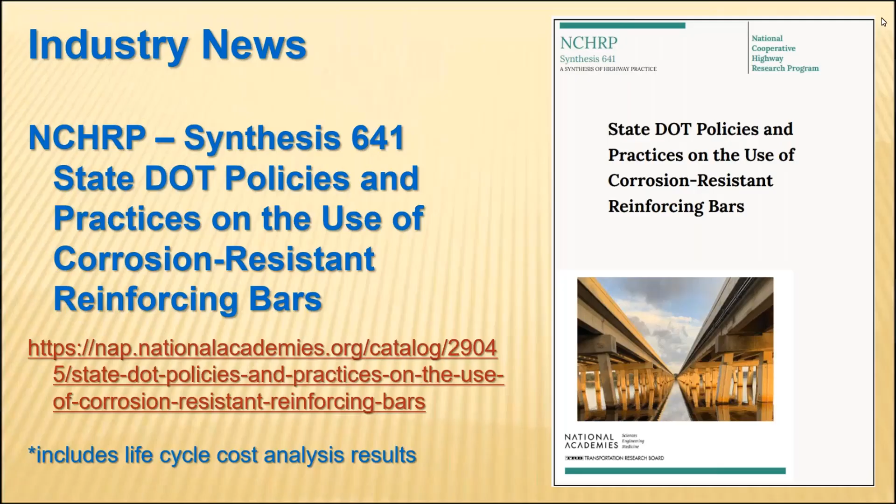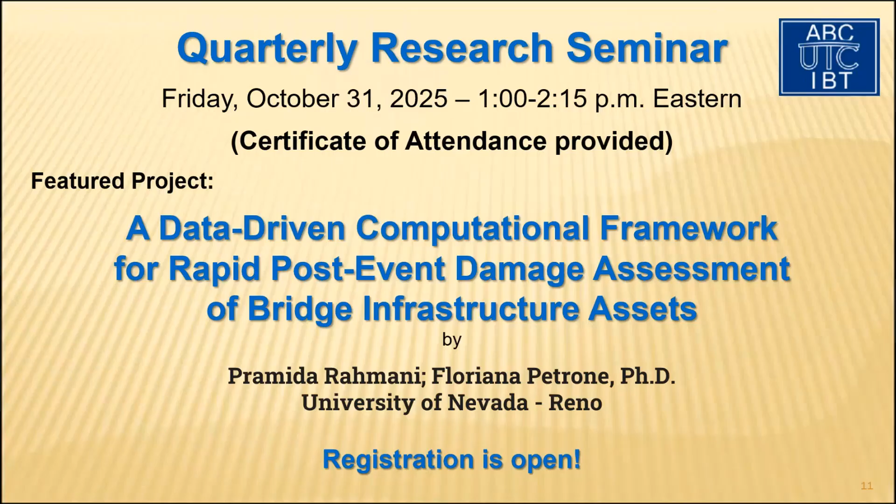Now for a few of our own IBT ABC UTC events. Our next quarterly research seminar will be held next week on October 31st, a Halloween event, from 1 to 2:15 Eastern. Our colleagues at University of Nevada, Reno will be presenting on data-driven computational framework for rapid post-event damage assessment of bridge infrastructure assets. Our next monthly webinar will be on Thursday, November 20th from 1 to 2:15 Eastern.

The presentation will be a one-sided approach, the longitudinal launch of the Pretty Rocks Slide Bridge. This is a really amazing project. They longitudinally launched a 425-foot Warren truss over a landslide area to reopen about half of the main park road at Denali National Park. It's going to be really a great presentation. Devin Altman with Jacobs will be doing the introduction, and it'll be followed by Jason Sieg and Chris Sweetgall from KWH Constructors with the details. Registration is already open. You can sign up on the IBT ABC UTC website now.

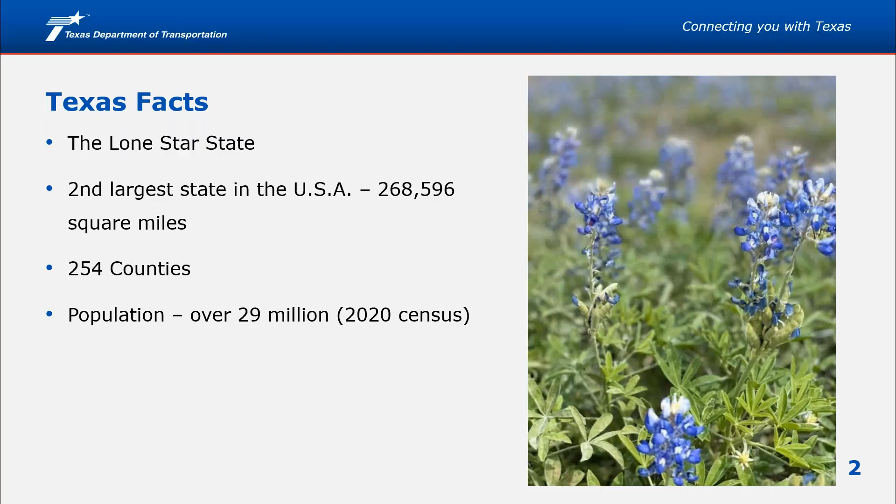We are the second largest state in the United States with over 260,000 square miles. We've got 254 counties, and we have over 29 million in population as of the 2020 census. Just a little bit about our bridges. We have over 56,000 bridges: for the on system, a little bit under 36,000, and then a little over 20,000 off system bridges. So we have quite a big inventory of bridges we take care of.

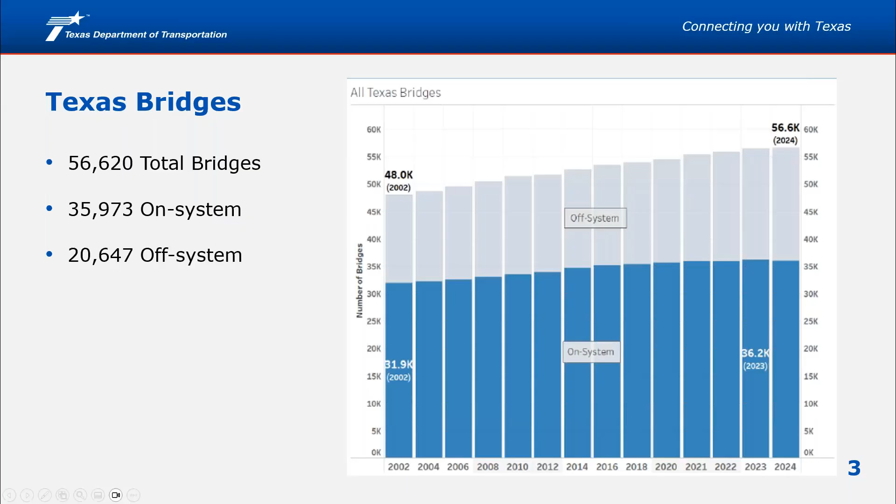The next slide just kind of talks about what have we been up to. This is not everything, but just like a lot of states, we are focused on digital delivery and working towards pilot projects, and we have a lot of different tools available to make that happen. We do monthly webinars. We call them bridge briefings, and those are free. They're during lunchtime, and we started those about a year and a half ago.

If you're needing some example bridge items, we have over 875 bridge standards. We also have bridge repair working drawings on our site, and all these are in PDF and DGN format, so you're able to use them for whatever project you're working on. We try to have data-driven decisions by using BRM when we need to do certain treatments on our bridges for preventative maintenance. We have a full suite of dashboards for our districts to use and see how they're doing for the different metrics that we follow.

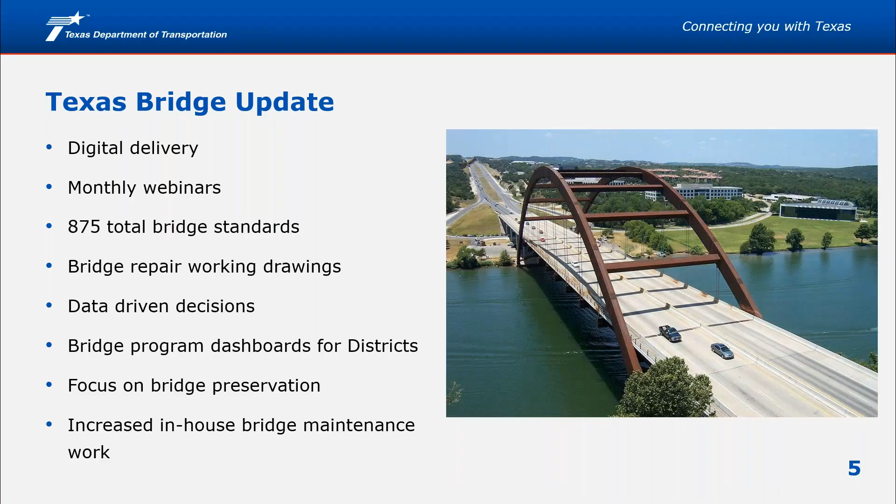Like I said earlier, we try to focus on bridge preservation around the state. Over the last 3 years, we have significantly increased our in-house bridge maintenance. We're doing that through training, getting out there and training the district workforce on how to do these repairs, and also putting out a lot of tips for construction and repair. All right, so that's just a little snapshot, and I'll turn it over to you, Robert.

Thank you, Jamie. Welcome, everyone. My name is Robert Owens. I'm with the Bridge Design section of the Bridge Division of TxDOT. I'm going to jump right into this. I have quite a few slides. I'm going to take you down a path, starting with a little bit of history within Texas, and it leads you into how we are evolving in terms of looking at ABC within the state of Texas. So I'll start here with the table of contents.

I'm going to start off with ABC the Texas way, what we've been doing and what's been working in terms of what we use in our standard details and how that has propelled us in terms of an ABC approach. Then I'm going to talk about a past project, a sample project, to talk about things we learned and how we're trying to evolve to improve our process and design decisions for ABC.

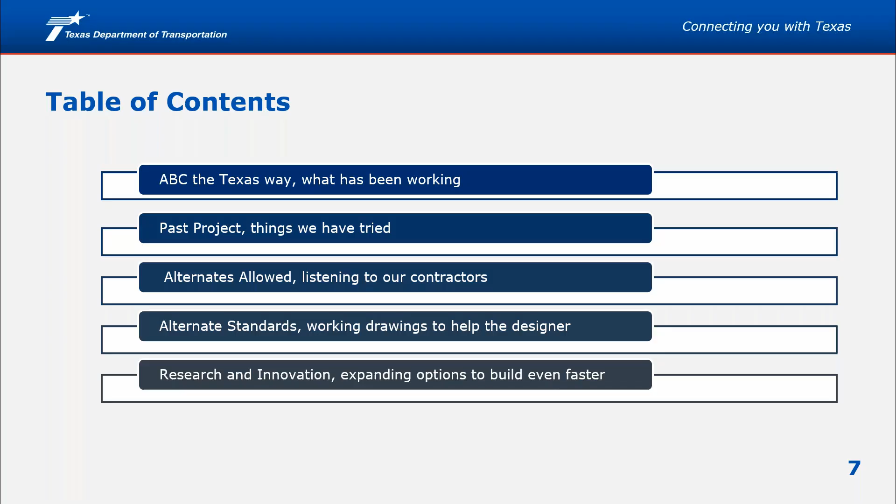Then I'm going to jump into what we've learned and how it leads into new innovations, like allowing for alternates within plan sets, and providing those documents as a toolkit for our designers to make these more of a standard practice and also simplify things for our contractors. Then I'm going to jump into research and innovation, looking at what we've learned and expanding our options to build even faster.

So I'll start off first with ABC the Texas way, just a brief highlight here. Texas is centrally south located within the United States. So we have coastal regions, marine environment. We have desert regions, mountainous areas. We have the Panhandle of Texas, which can get quite cold, so we do have ice and snow. So we do have varied temperature and geographic conditions within the state of Texas.

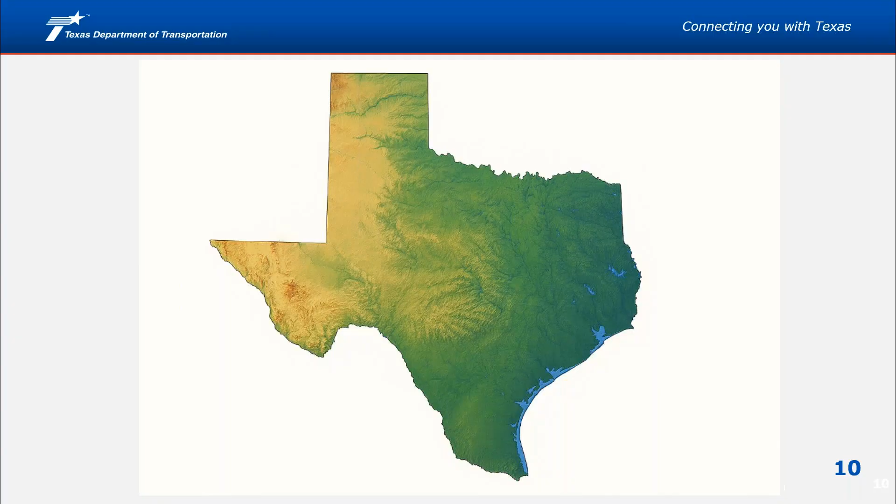Just a couple maps here to share. Looking at accelerated bridge construction, I challenge people to rethink what accelerated bridge construction can be.

For TxDOT, we look at ABC as not just highly complex approaches. We look at what we've created within our standard library to actually help turn around these projects in a quick time frame. So that's our goal within TxDOT.

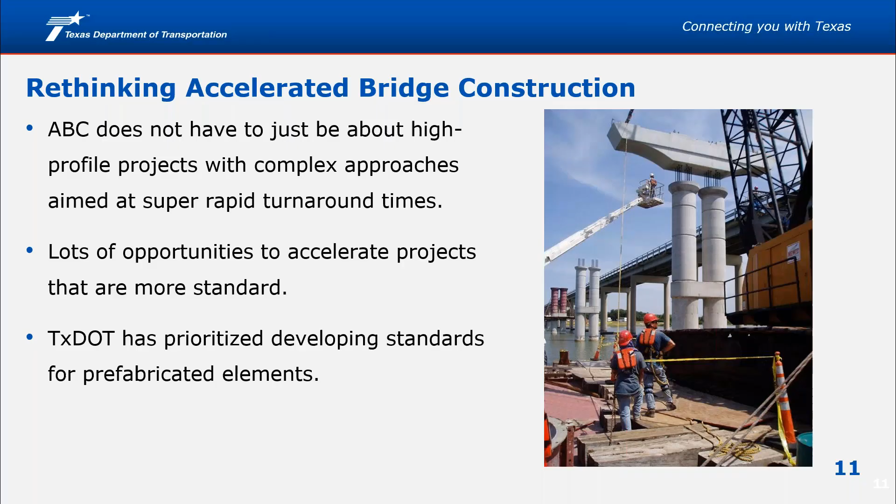A lot of our standards prioritize prefabricated elements. Another thing we do is try to keep it simple. This is feedback we received from our contractors, since they're the ones building these projects. To keep these projects moving quickly, I think keeping it simple is key. We try to utilize as many standard details and techniques as possible, and we also allow for opportunities to include multiple options within the plan set. I'll get into that more later, and how that became another tool in the toolbox.

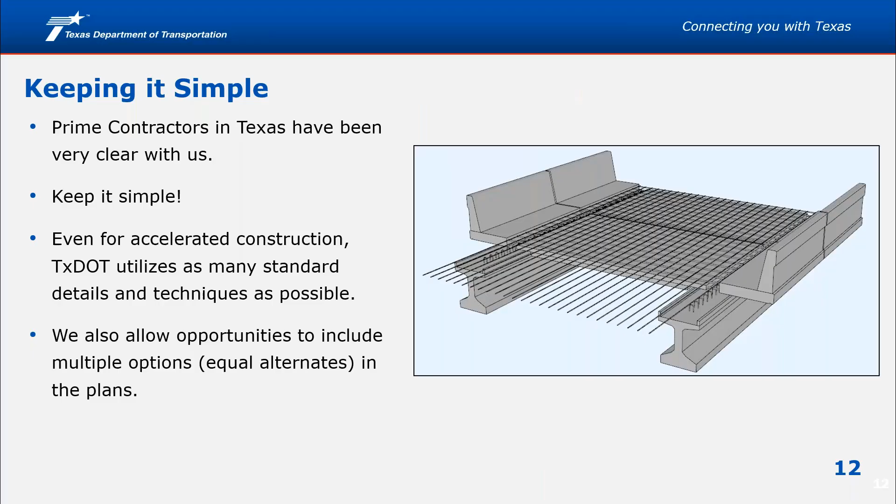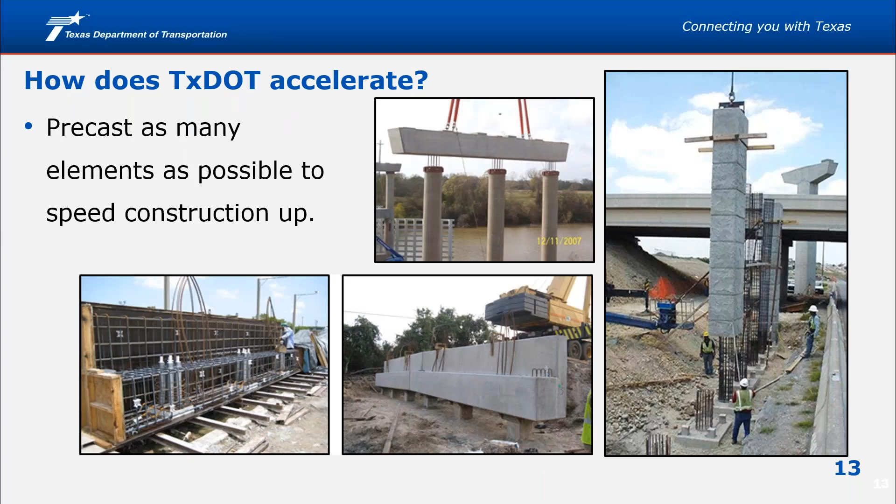We accelerate. We try to precast as many elements as possible to speed up construction. You can see several pictures here of different things we've used in past projects - precast caps, abutments, and also precast columns. Texas has a history of designing and detailing for ABC for a long time. One of the earliest inclinations for this approach is the use of our precast concrete deck panels, PCPs.

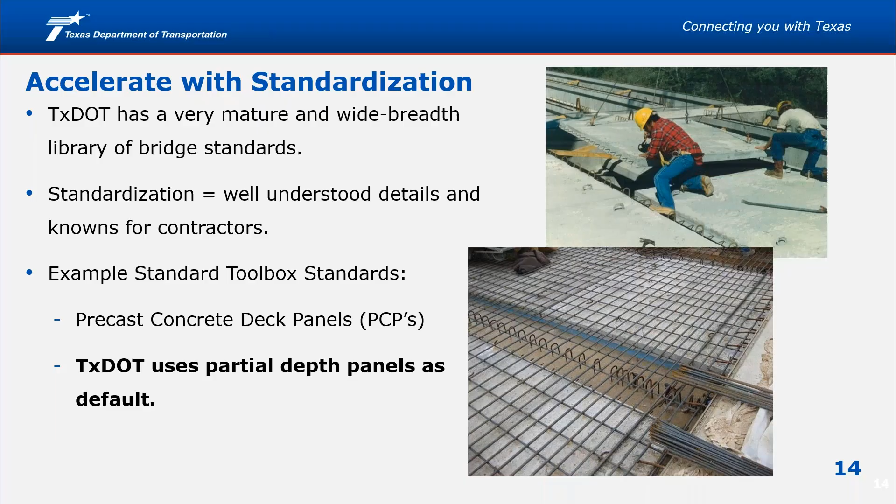We look at standardization. We've created these standards and details to accelerate construction. You can see this picture on the top right - it's an old picture, so we've been using PCPs for a long time. When we standardize these details, it makes it a regular process and procedure for our contractors.

That's one of the benefits of standardization. Again, PCPs are panels, and another go-to is our pre-stressed concrete beams. We have our Texas shapes that we developed back in the day - these have been around since the early to mid 2000s. We worked closely with our fabricators to come up with these shapes and designs to accelerate construction. You can see that picture on the right showing the PCPs and how that comes together.

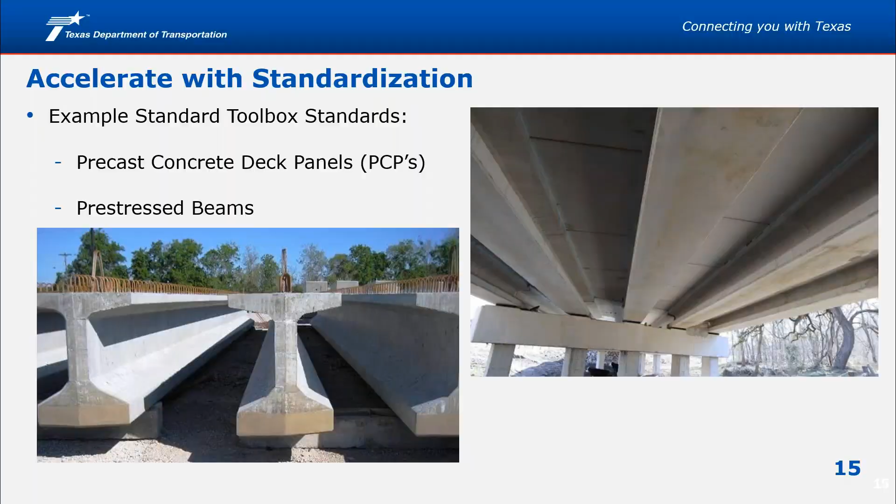Leading from the Texas approach, within our methods we've standardized so many different elements that we've kind of created an ABC approach. Maybe it's not as fancy as some slide-in type projects, but standardization has really helped us. So then looking at a past project, we want to look at projects we can learn from, to innovate, push the envelope, and develop new procedures for our designers.

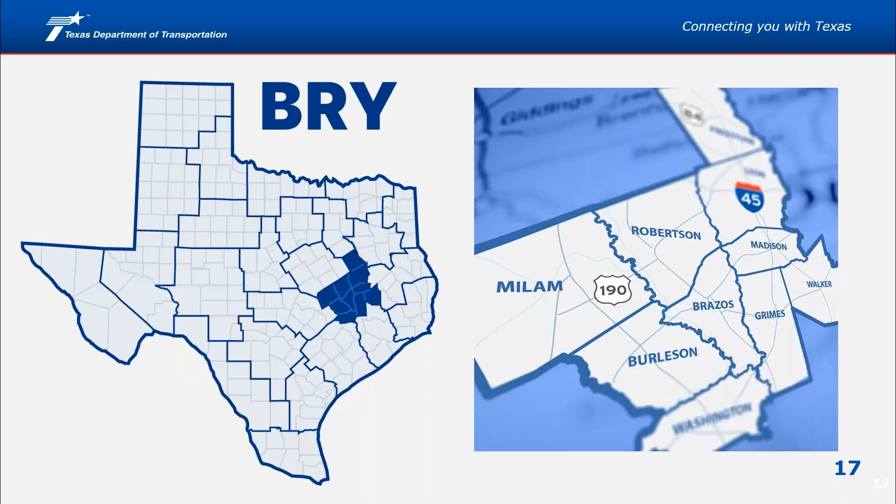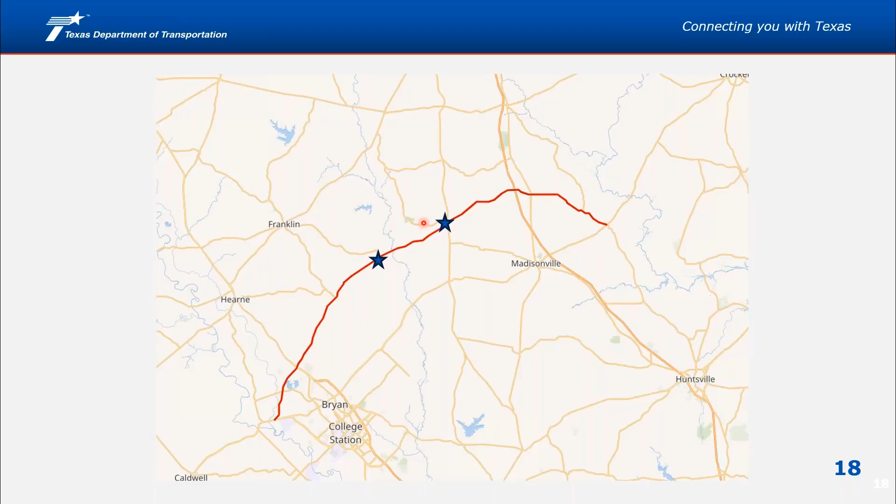So, maybe not the cheapest, but we wanted to get in here quickly to allow the traveling public to travel this route. What we did is we looked at UHPC closure pours, but then we also developed our own in-house rapid set fiber reinforced concrete, due to the proprietary costs associated with UHPC.

So we developed a Texas mix for UHPC. Construction access cost was also critical to fabricate and place these elements, and that cost about 800,000.

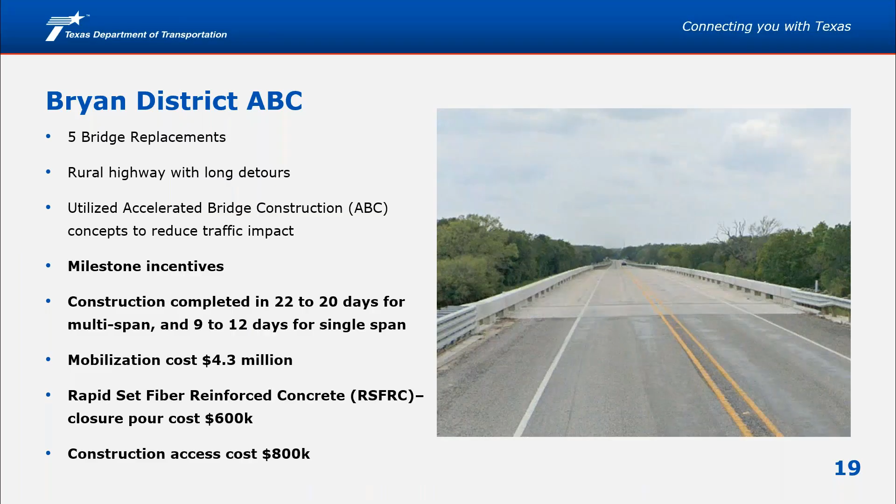So what the consultant did, and we worked with them, was develop a 6-girder system where they actually cast the deck with our Tx girder shapes off-site, creating a prefabricated unit with the deck and girders. We also focused the closure pours within that rapid set fiber concrete over the top flanges to eliminate the need for forming.

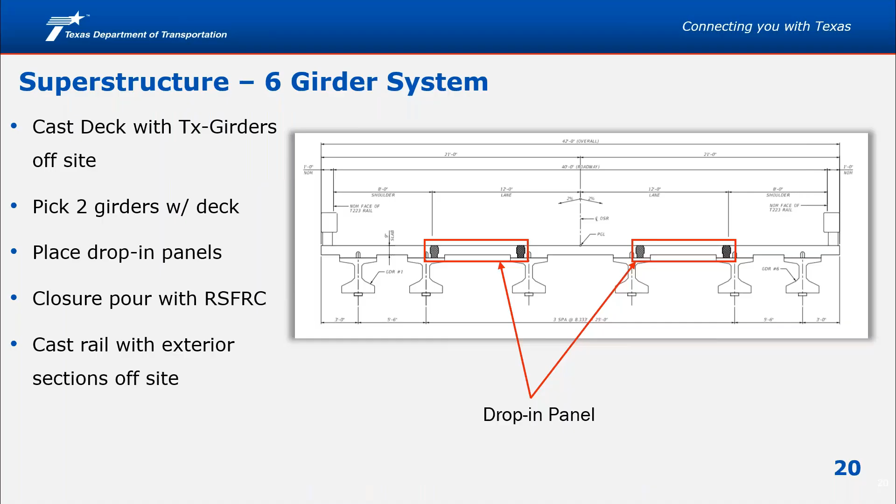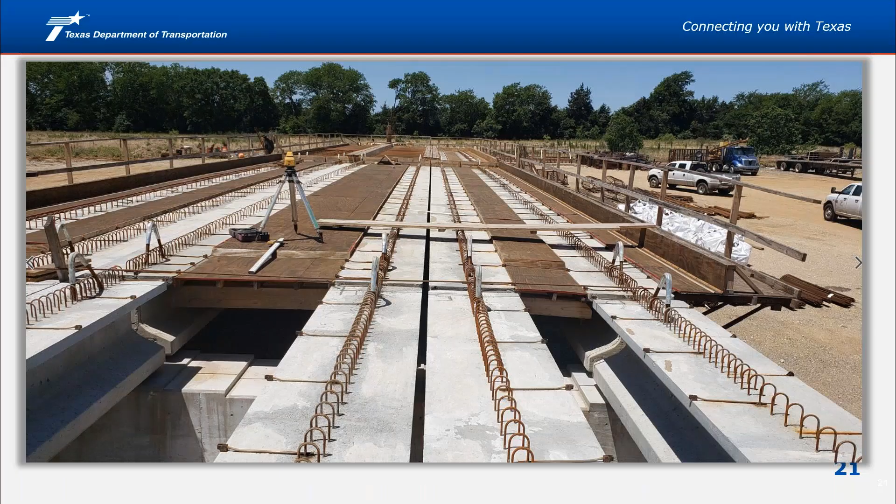We also cast the rail with the exterior sections off-site. One of the costs associated was the construction easement, so we needed a location to construct these bridges off-site due to geometry controls, essentially building the bridge in pieces and then placing those pieces at the final location. You can see a couple pictures showing the fabrication of the deck off-site, and again, geometry control is critical.

So here, setting the screeds to place the deck is critical, making sure you have the profile you're looking for, so when you actually place these elements at the final location, everything fits correctly.

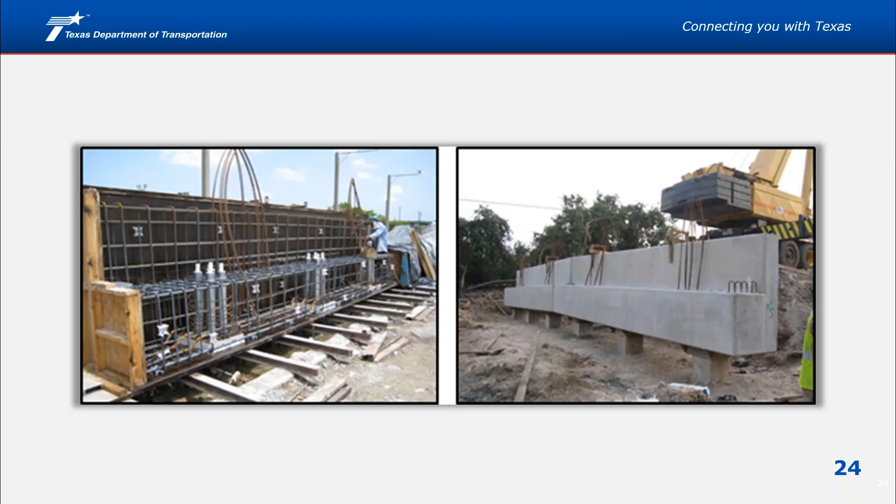Here's a couple pictures I showed earlier. These were the precast concrete abutments that the contractor fabricated. We actually had to change our standard details a little bit to get these to work, but you can see the final product there in place.

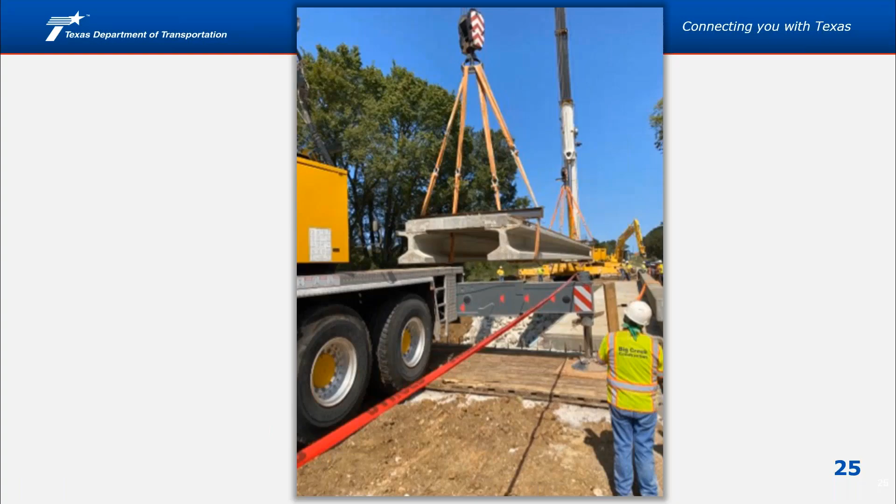This picture shows the 2-girder system for one of the interior units, and this next picture shows the exterior element with the rail cast. After you get all those pieces placed, then you come in with the UHPC closure pour, or rapid set fiber concrete pour, as we call it.

Within these details, we stuck with more of the straight bar. Since we had that engagement with the concrete, we were achieving around 16,000 to 18,000 PSI. Luckily, within the mix we designed, we were getting the strength needed for these connections.

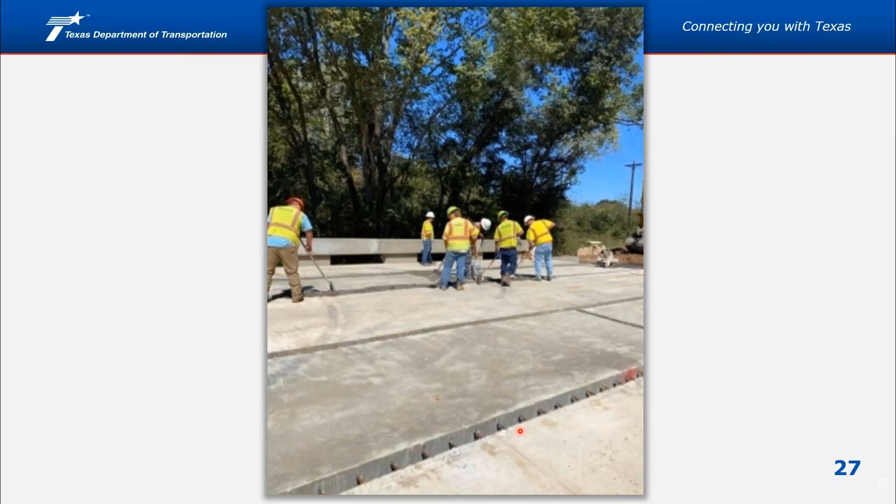So from that project, we had a discussion with the contractor to learn about how this process worked, what was working for them, what was not working for them, to push innovation and refine what we're doing as designers to accelerate the construction.

The closure pours work well, again using the top flange as the form. There were some complications within the UHPC mix because contractors are not as familiar with that type of mix, getting the fiber dosing correct, the mixing equipment. But you run through mock-ups to refine that and allow the contractor to become more familiar with working with the UHPC mix.

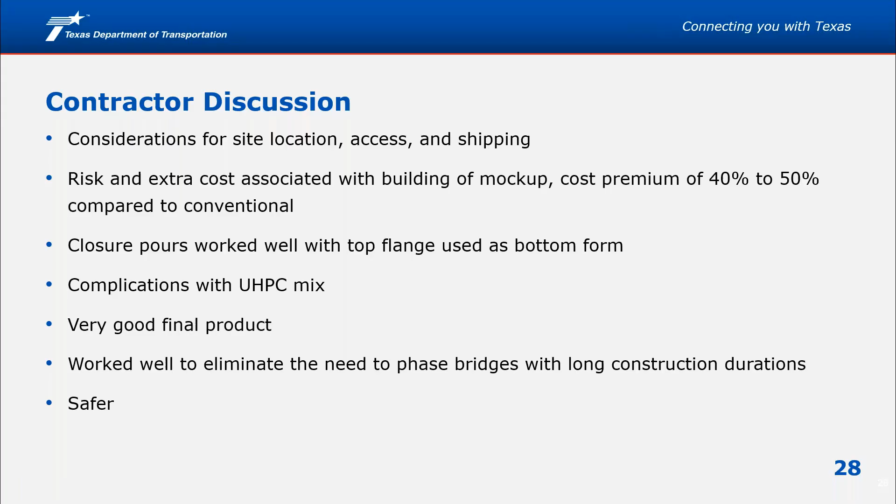We were extremely happy with the final product, and the contractor was generally receptive to this. They actually liked this process, and it did eliminate the need to phase these bridges with long construction durations. The contractor also said it was a lot safer than normal construction.

So next, I'm going to jump into looking at that past project, what can we do better?

One suggestion that was talked about, leading up to our standardization of elements, was looking at alternates allowed within our plan sets. So we look at whether there are elements within your project that can be precast or prefabricated. It can also be a steel girder unit with a precast top deck. It doesn't have to necessarily be a concrete superstructure. It could be a steel girder system, which we have used within projects in Texas.

Legally, we make sure we put these alternates within the plan sets clearly stated, due to legal requirements. Looking at the original design and construction ideas, we can come up with new alternate plans.

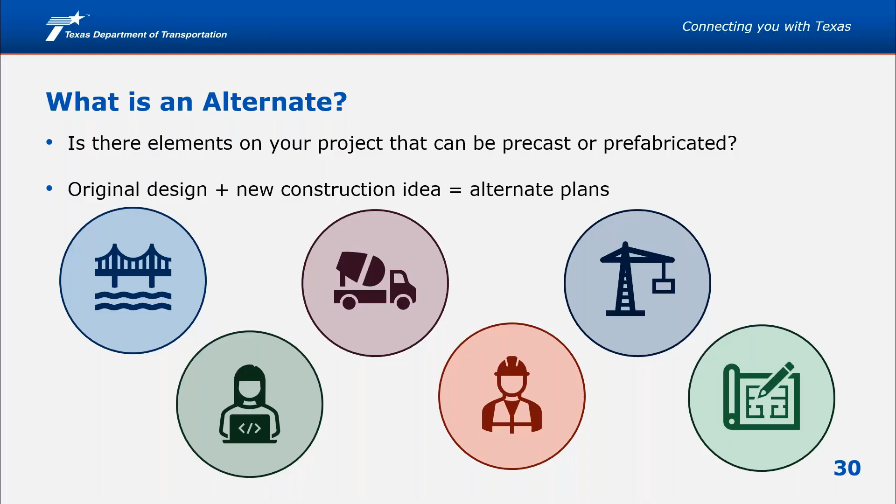The use of our alternates, in terms of guidance, is provided within our TxDOT Bridge Design Manual, our LRFD Design Manual. Within the manual, it clearly states how to set these projects up, within the general note structure of our plan set, and also how to allow for alternates for superstructure and substructure elements.

We do have an internal form that documents this process, just to make sure we check off the boxes, making sure it's clearly stated there won't be effects to time, schedule, or costs if an alternate is proposed.

This is something we provide as an allowance for post-letting, and these apply to standard bid-and-build projects. This does not apply to design-build.

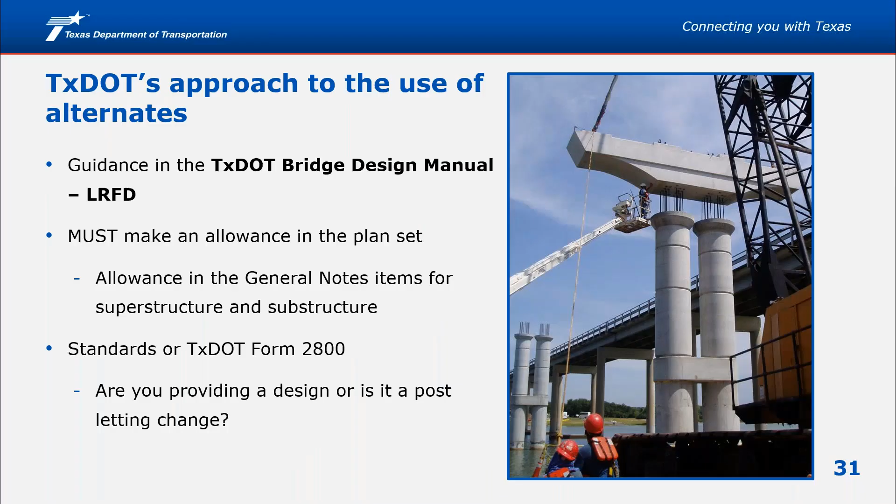Now I'm going to jump into our alternate standards within our package, and what we have available. In terms of the tools we've developed for designers, a lot of our standards can be found within our TxDOT standards website.

You can use this link, and you can actually Google search TxDOT Bridge Division standards, and click the link, and it'll lead us to our vast library. Like Jamie said, we have 875 standards.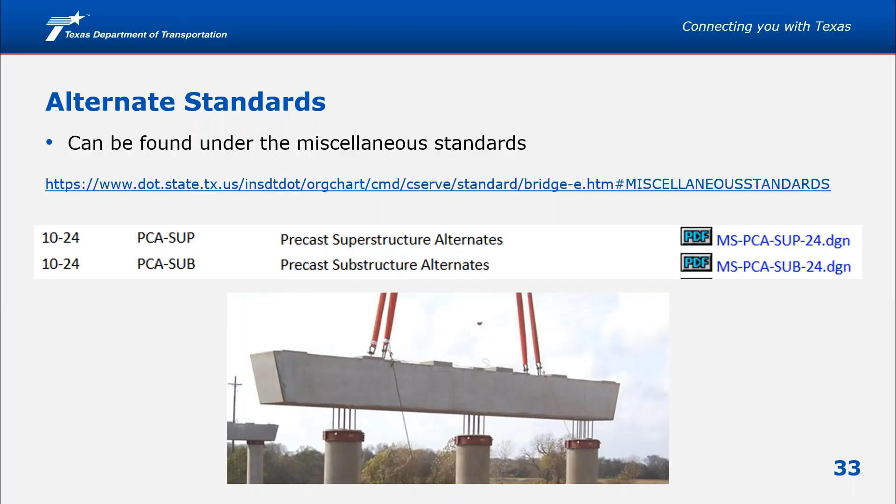Here's a snapshot of a precast cap that we have, and we have precast superstructure alternates and precast substructure alternates. Within those alternate standards, we called it a standard, but technically it's a working drawing per se. What this does is provide a roadmap for our designers to make sure they're checking all the boxes when it's going to go to letting.

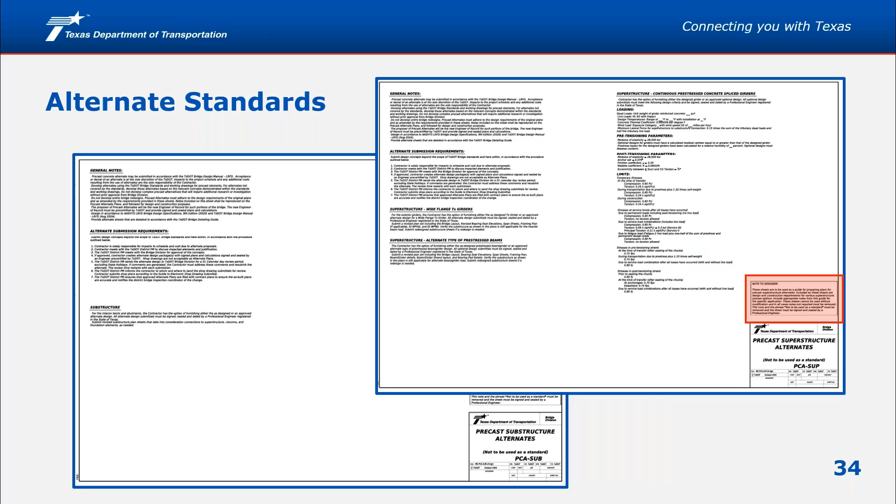So what we do is we've created these sheets where it has the superstructure notes and/or substructure notes, and the designer goes through them, removes what doesn't apply to their project, and retains the information that applies to their project. For us, we call it a standard, but like I said, it's more of a working drawing.

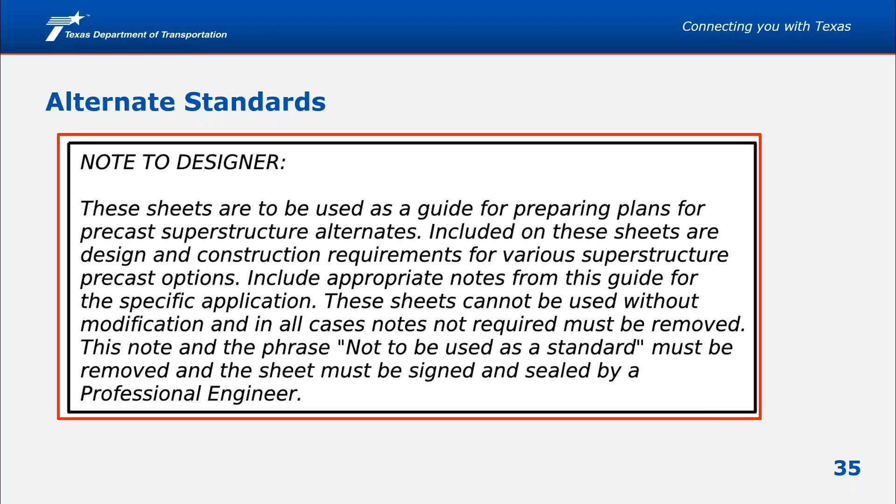And then there is this note to the designer that it's a guide for preparing the plans. It's up to the engineer still to sign and seal these details, and they need to make sure they're applicable to their design.

The designer must read all the notes and remove what's not needed, and again sign and seal. So there is still responsibility that the engineer needs to take when they use these details, but it provides a good roadmap so they're not guessing. These are based on what has worked in the past, and what we've refined over our various processes.

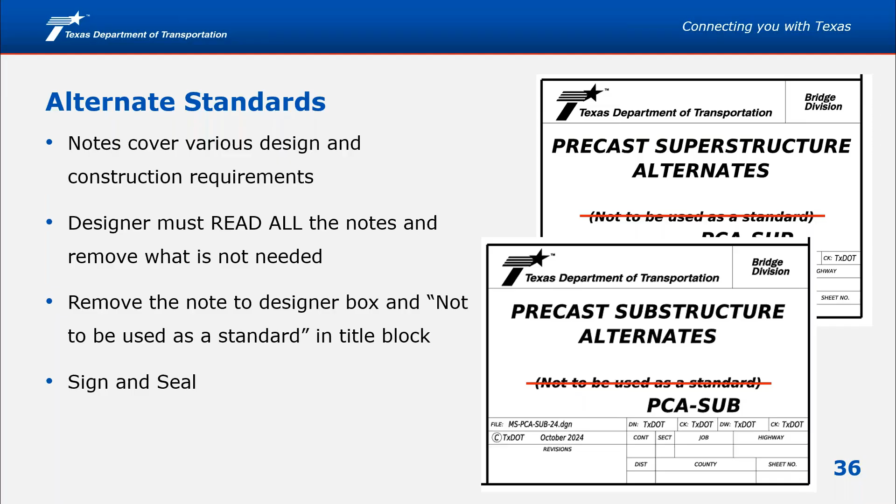We're not going to pay extra for a different alternate that's proposed. It needs to come, hopefully, at a cost savings to the contractor, and that would be the need to push innovation and allow these alternates.

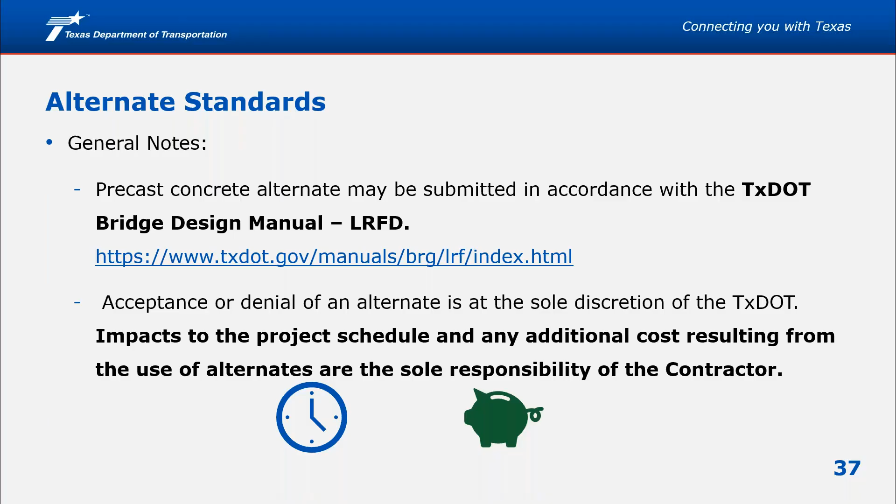I do mention that we don't want to stifle innovation. So we do allow innovation, maybe to push the envelope, but for most of our projects, we try to keep it simple and more standard for the contractors, and we don't want to have a research project per se when we're trying to make decisions in terms of these alternates that will be used.

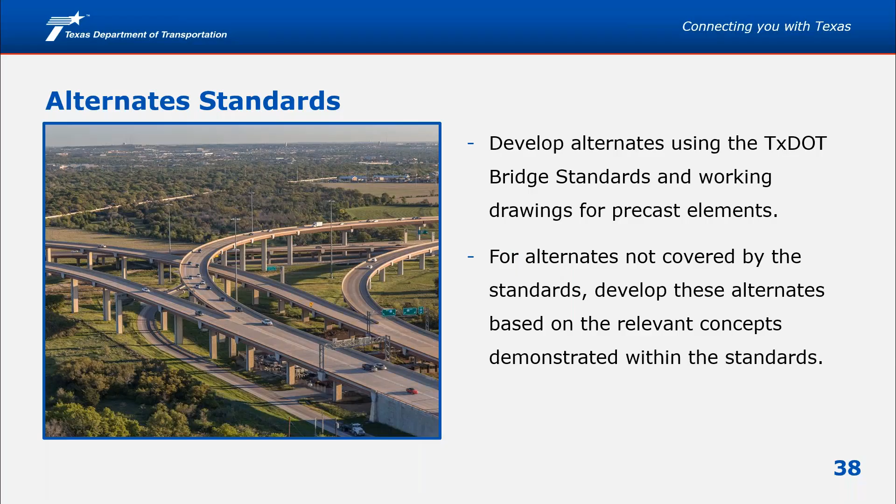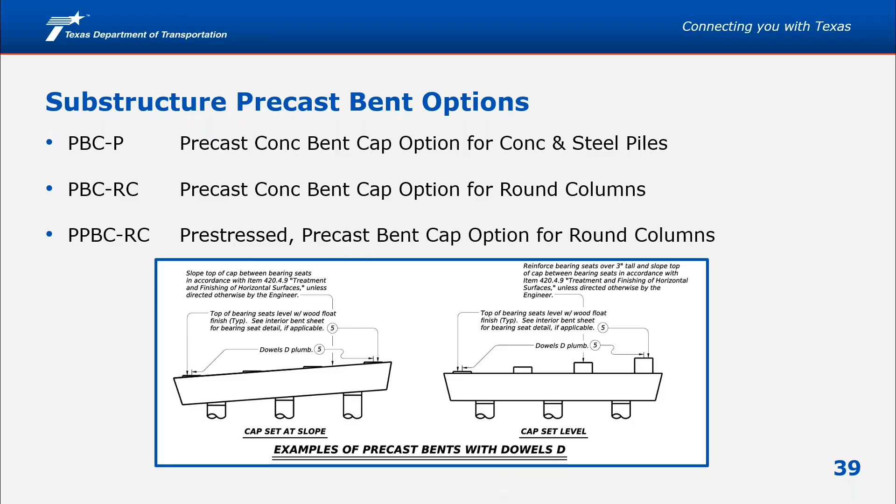Like we have the precast, this is for substructure elements. We have the precast bent caps for concrete and steel piles, and then round columns, and the pre-stressed precast bent cap option. Another thing that we have been looking at, or we have pushed, is development of alternates for superstructure elements for concrete. We actually have what we call the wide flange Tx girders, and I'll get into that a little bit. And then we also allow alternate types of pre-stressed beams.

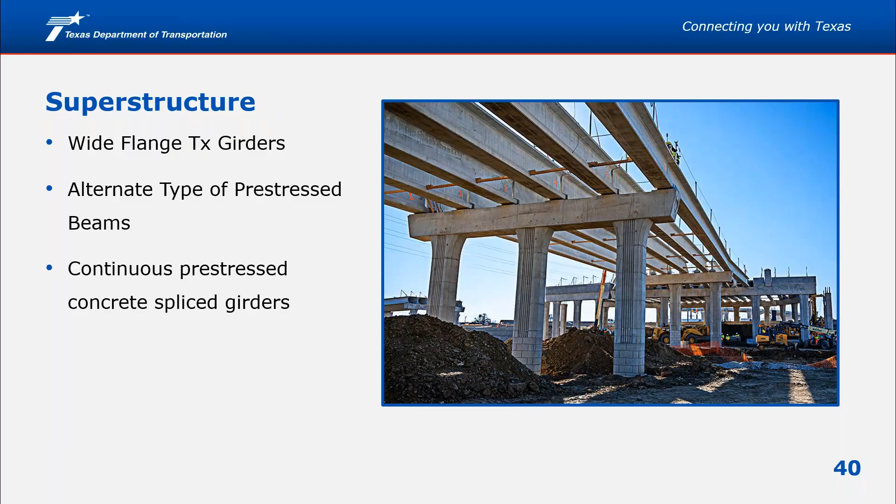I know in the past, with the past project with the Amarillo district, we did allow the use of the NEXT beam, the Northeast Extreme Tee beam. And for our continuous pre-stressed concrete spliced girders, we have an allowance for alternates. Just due to the complexity of those structures, we want to make sure the contractor is able to make revisions in terms of means and methods, to offer that flexibility for them to speed up construction. Because contractors have different means and methods, and they know best sometimes, and they can work within parameters that we provide to them to accelerate the construction for spliced girders.

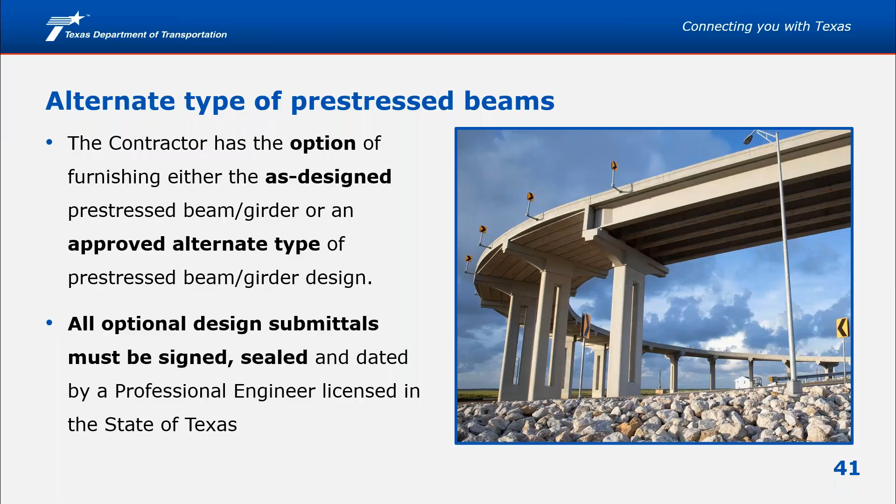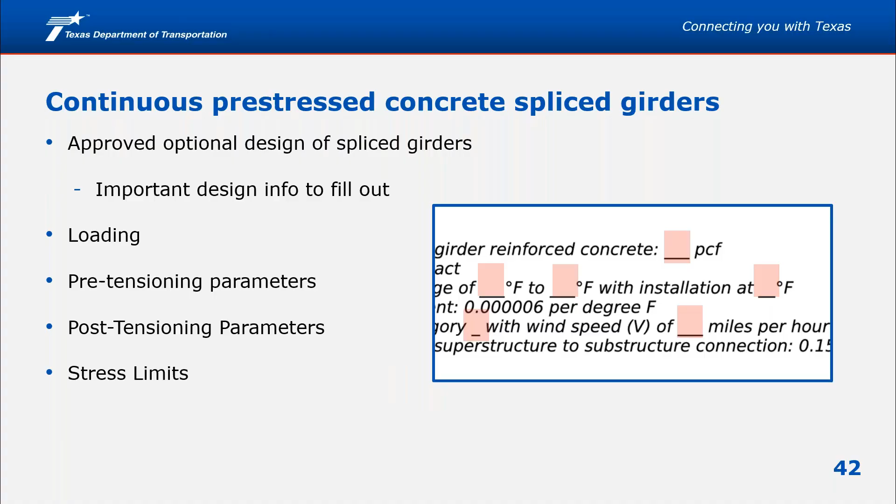So again, the contractor has the option of furnishing either the as-designed pre-stressed beam or girder or approved alternates when they're allowed. And all optional design submittals must be signed, sealed, and dated by a professional engineer in Texas. And for spliced girders, like I said, we try to allow for alternate designs, but we have working drawings within those precast alternates that give parameters that are specific to spliced girders. You have loading parameters that you need to look at, pre-tensioning and post-tensioning, and then those stress limits. So these are the things that, if the contractor does want to have these redesigned or come up with a new design, are the parameters that we're looking for that form the basis of that design. Because again, we don't want to change the design too much.

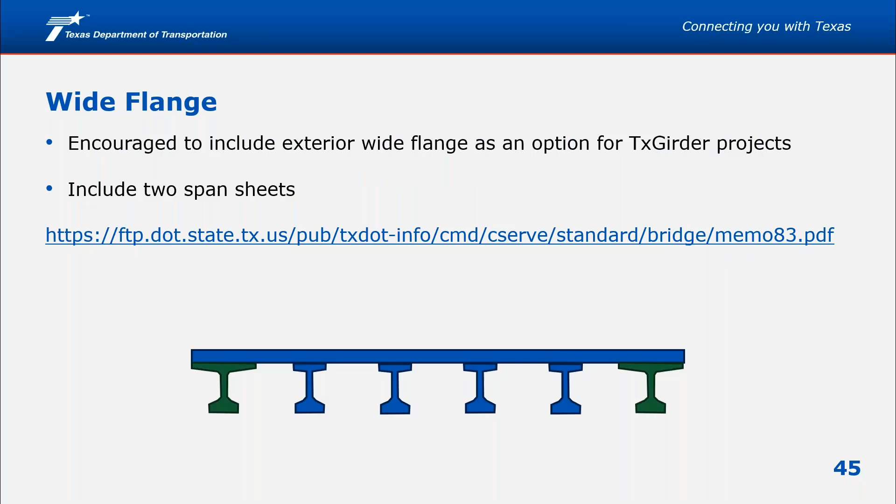So the first one I'm going to talk about is development and validation of precast column solutions for Texas bridges. This was led by the University of Texas at Austin at CTR. So, precast column history. Again, we like innovation. We've tried different ways to precast columns to accelerate construction. We've had full-height precast columns, which are extremely heavy, and you have to have a grouted connection at the top and bottom. Those work well if you have the right equipment and the contractor capability. But then we also looked at other ways: is there a segmental approach to put these pieces together and maybe make them easier to handle and place? And then we also looked at the shell option, which is lighter, and it provides permanent formwork for the inside pour.

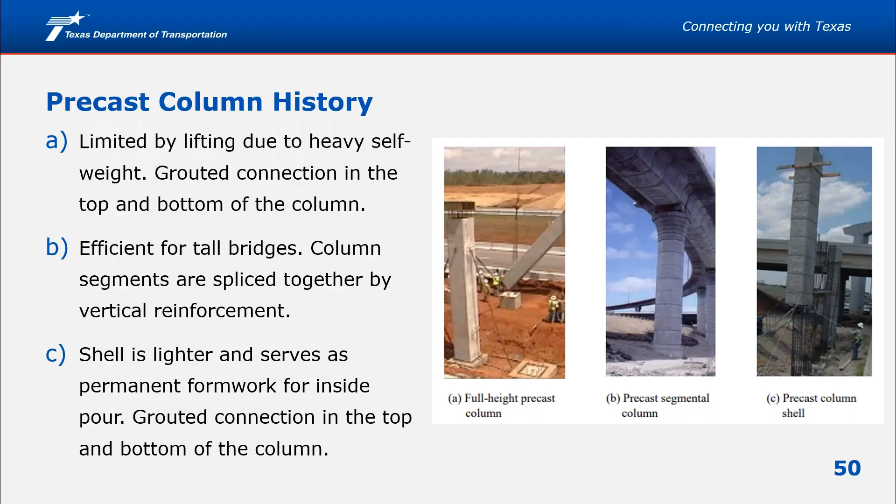And then we have the grouted connection top and bottom. So we've gone through this history of precast columns. So what we were looking at was to focus on the shell approach because we wanted something light, easy to place for the contractor. So what we're looking at is, how does this perform or behave, and are we going to feel confident that this is a good method, as a designer?

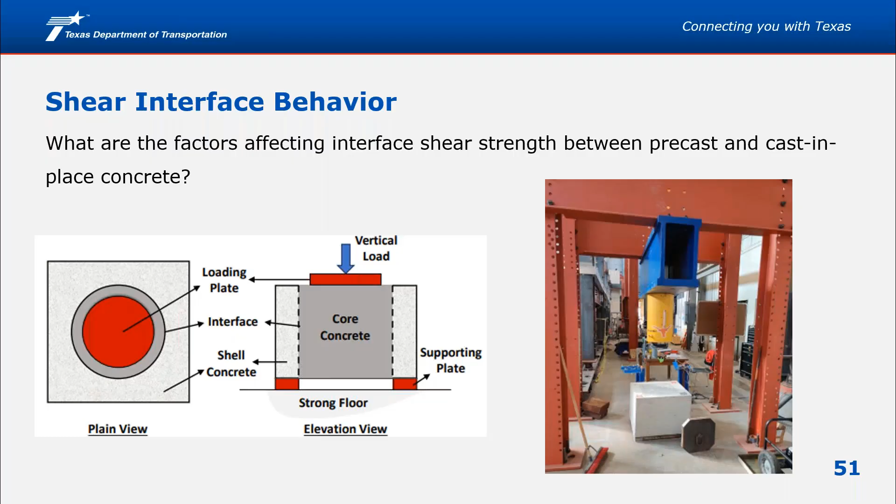And so what we're looking at is the shear strength, bond between the precast shell and then the cast-in-place concrete. So what the University of Texas did is they set up some full mock-up tests for these shells, and I'll kind of get into this here. So we looked at also different shapes. So we looked at a square or rectangular footprint for the column and a circular. Circular interface performed better, higher strength over that interface.

And one thing you might ask is, well, if there's a difference in strength between the shell and the core, would that not perform as desired? But actually, what we found is it performed well, and there was no detrimental impact within that difference. And then the other thing you want to look at is, is roughening the surface better, or can we just fabricate these with more of a smooth surface to accelerate fabrication? Because we want to make it easier for the fabricator. The less steps involved, the better for a fabricator.

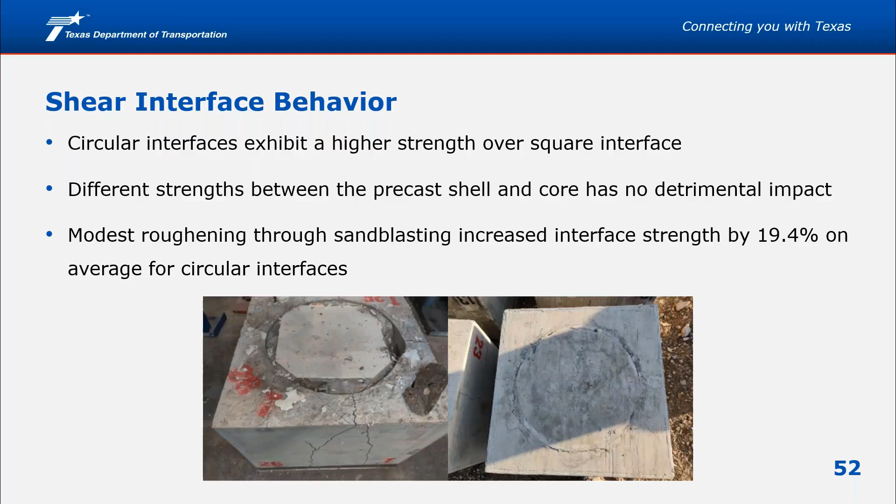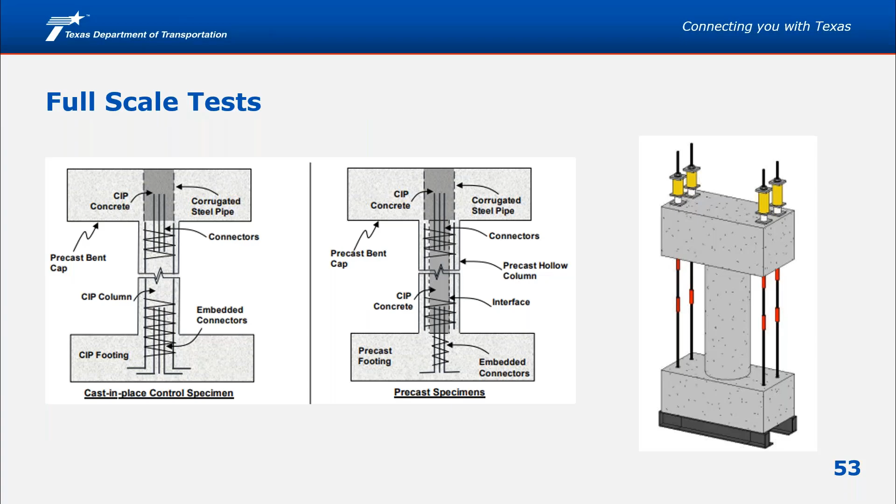And modest roughening of the surface did increase the interface strength by almost 19–20% for the average circular interfaces. But it didn't really have too much of an effect. We felt confident that if you didn't roughen the surface, it performed very well. So what the university did is, again, they built up full-scale tests with the cap and then the connection into a footing. And that's a diagram there of that full-scale test mock-up.

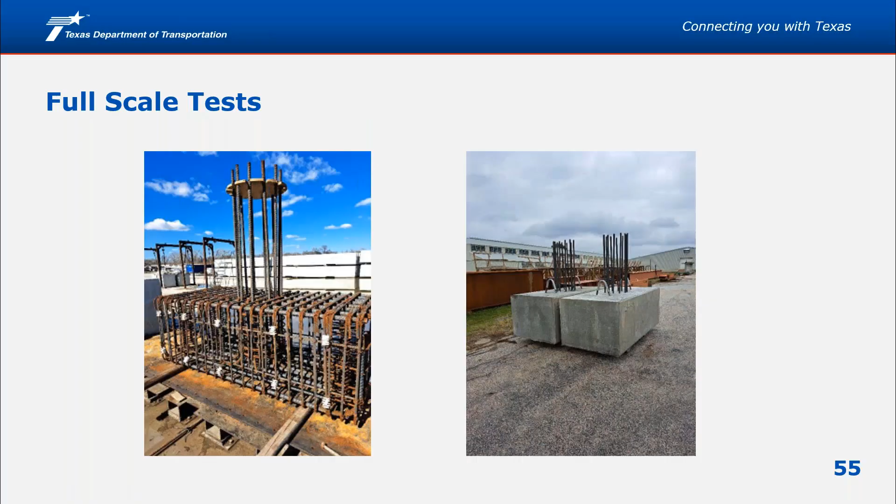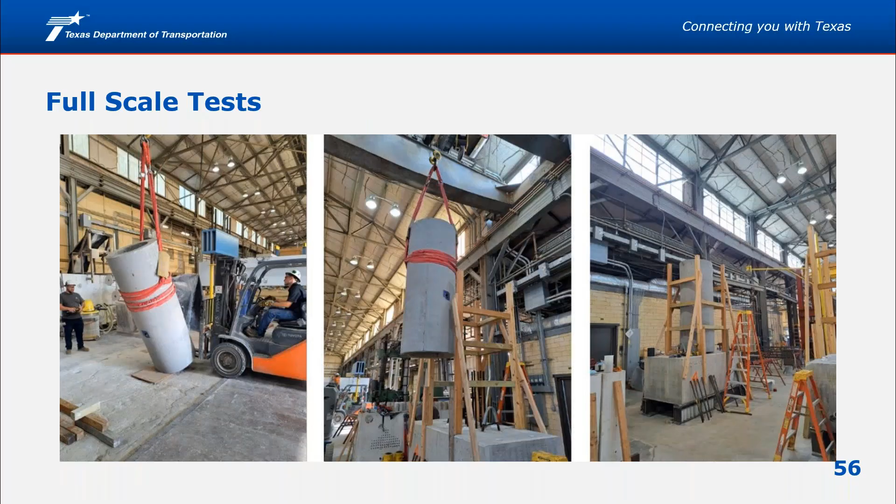And then here is a couple shots of the shells. So these were actually spun cast in the fabrication yard. And you can see, again, we went through the process of intentionally roughening the interface and then not roughening it, just kind of leaving it as is. Some more pictures here. This would be the footing pictures here of the lab, placing the shell. Even just this shell section, they were able to place it with just an overhead crane lift, and then with the help of a forklift to get that in place.

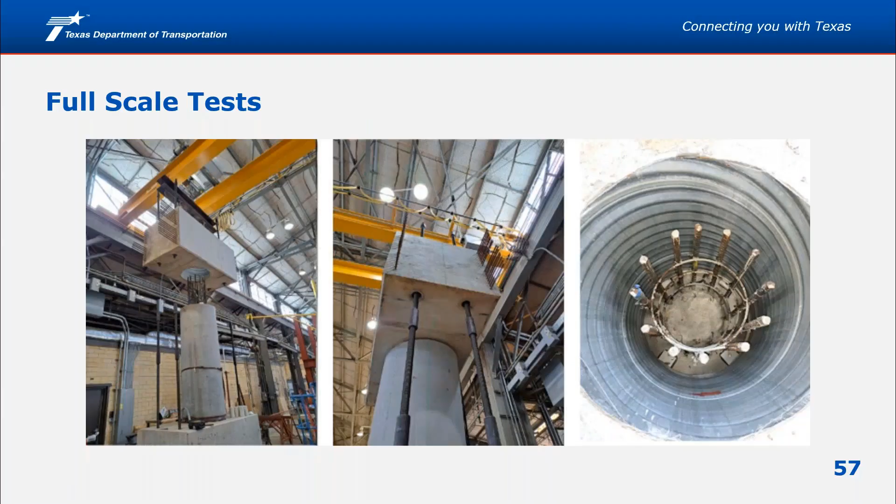More nice pictures from the lab there. You can see the picture on the right is actually the CMP, the corrugated metal pipe portion for the closure pour into the cap. So full-scale tests were done, low eccentricity at 6 and 12 inches, and the precast columns exhibited elastic behavior, indicating very good performance. So we were satisfied with that. Again, internal roughness of the precast columns had minimal impact on the final resistance, and the precast columns showed less cracking than the control specimen, which was fabricated and load tested.

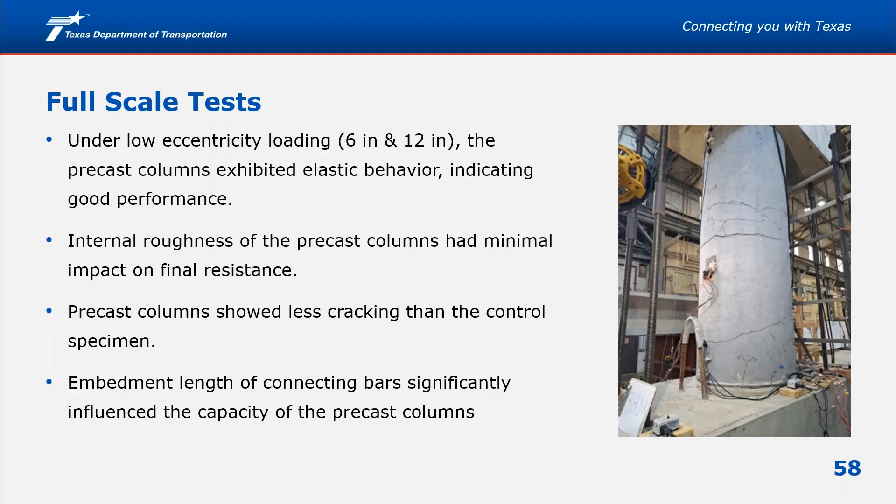And what's maybe not surprising, the embedment length of the connecting bars significantly influenced the capacity of the precast columns. And so you can dive into the research report. If you go to the CTR library at the beginning of that link, the hub link again, you can type in this research report and read that. And the researchers provide us with some design assumptions to help designers, suggested specifications and example details.

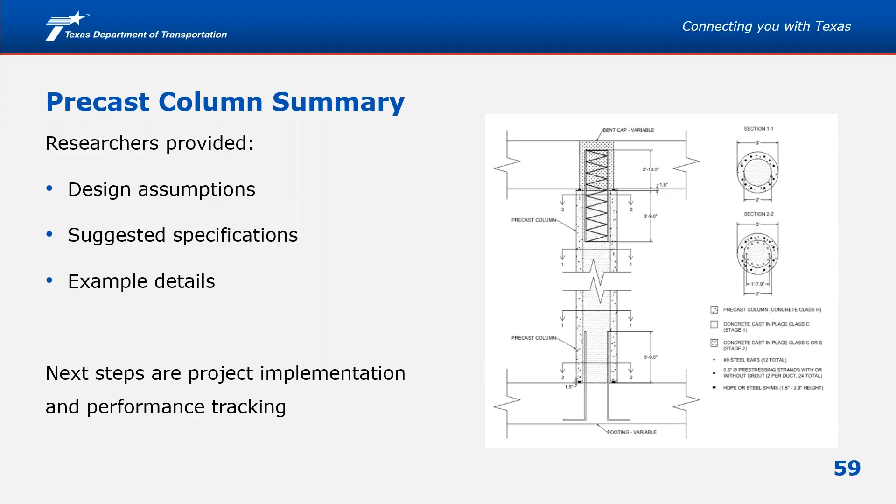So currently, right now, we're designing a project for the Lubbock district using precast columns. So we're right now at the implementation phase. So we're going to put these to a real-world application. But I feel pretty confident that these are going to work very well. So that was an example of substructure.

So, again, you look at what other people are doing and get ideas from that to help drive your innovation, and you push the envelope with each step to accelerate construction and look at new details. So again, contractors, one of the things that they commented on, with the use of the wide flange girders and our normal Tx girders, they want to eliminate the overhang forming and the time

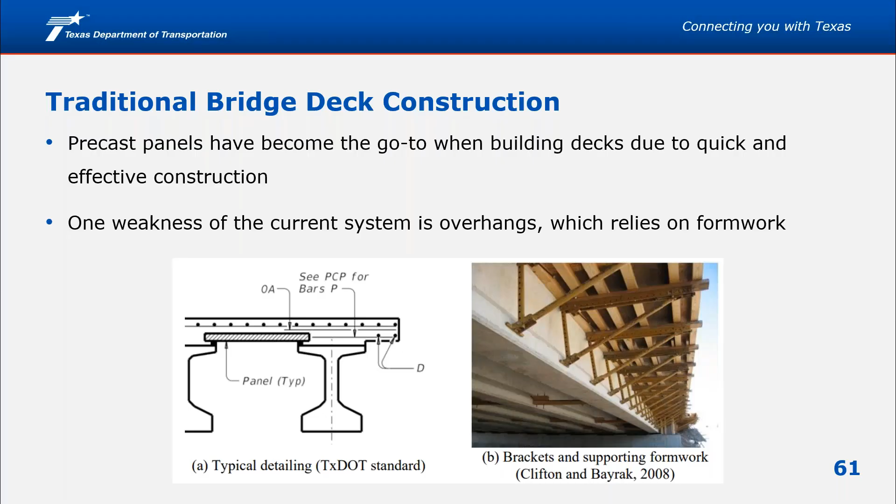it takes to form. And so what we did is we looked at using a precast panel that's a wire truss partial depth panel, fabricated to have two panels, one with the deck overhang and one as the interior deck support. So you see what that looks like here. And you can see that wire truss system. It's actually a welded truss system. And then what we do is we go back with a partial depth pour within this section. You'll see that here in the next couple of pictures.

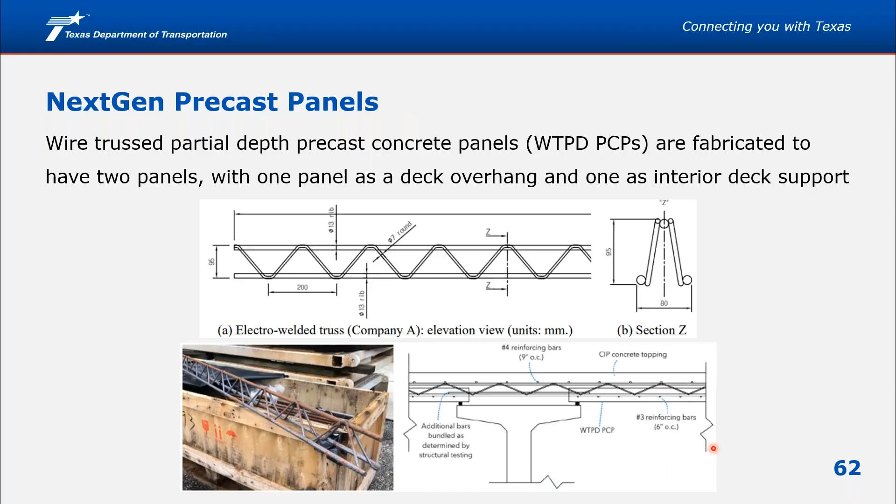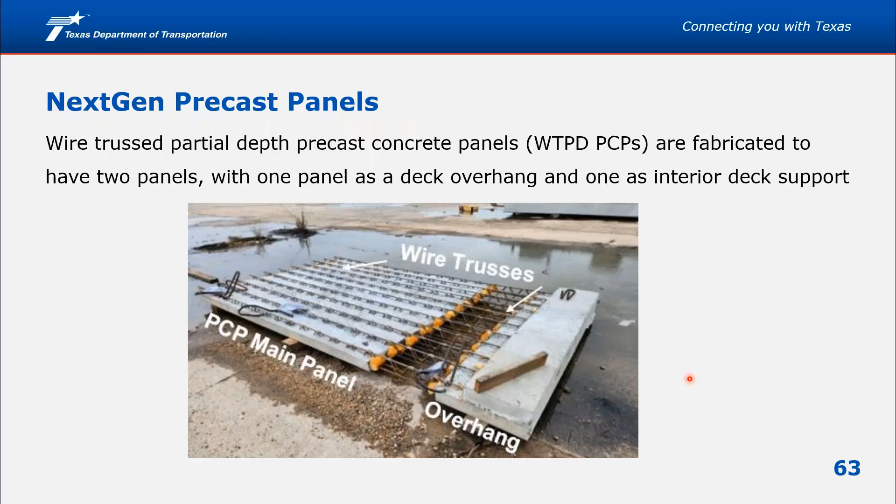So here you see a little bit more detail of the actual PCP main panel, and here's the overhang. You can see how this is formed up, and then you place these panels and come in with your cast-in-place concrete pour. Here's some pictures. So what the researchers did is they built some full-scale mock-ups to look at the performance of these. There you can see the forming of these panels in the lab, and here we just used a foam and tape system when we placed these panels to form them.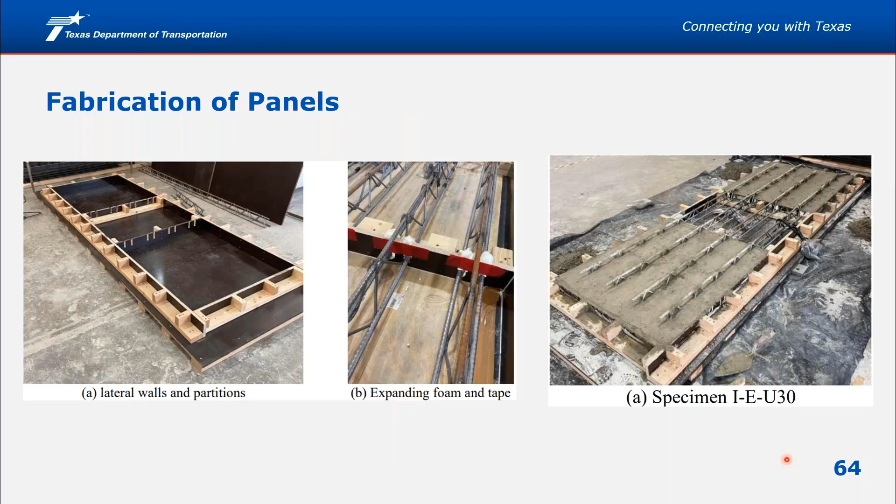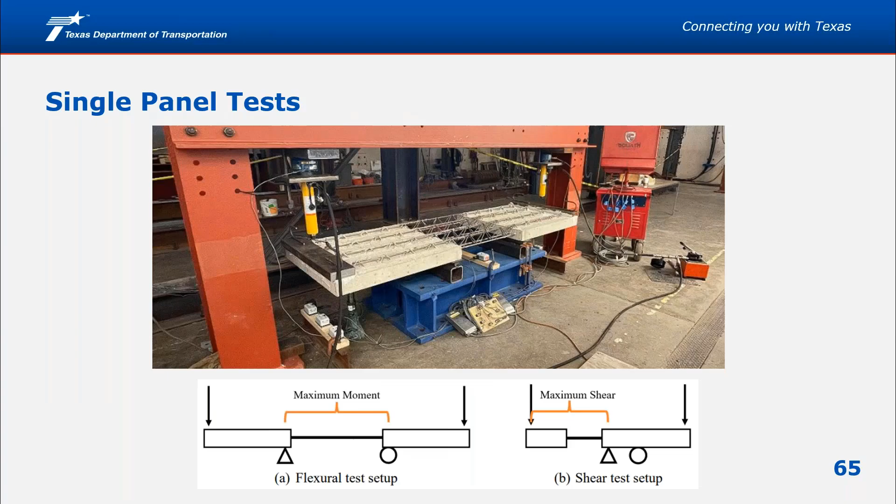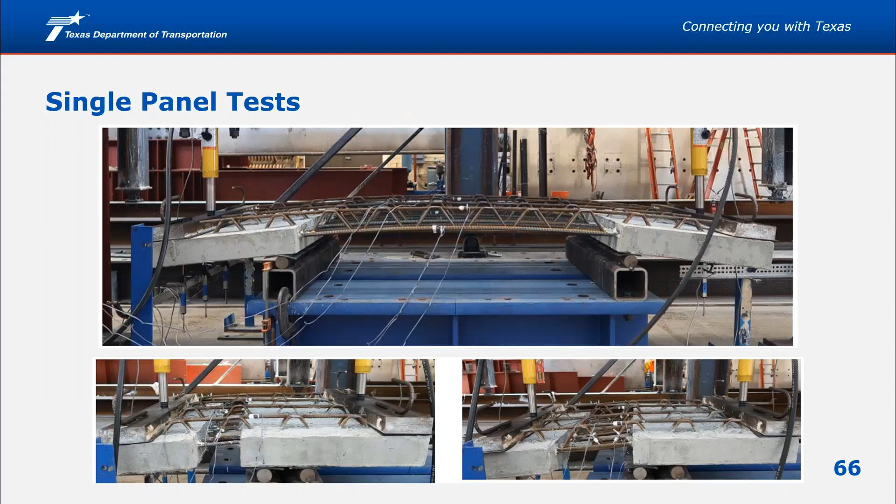And here's the specimen. So we looked at single panel tests here. We tested for maximum moment and maximum shear. And you can see the test setups there, the typical sections for those test setups, and that picture there with the full scale test setup. And here's the single panel test. These were for flexure and shear, and you can see those are deflecting quite a bit. So here's the little isometric view of the test setup.

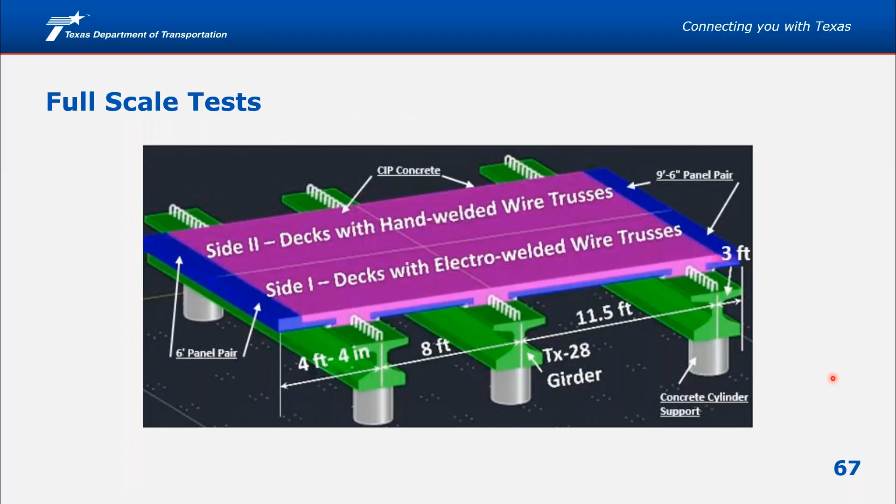So we also looked at the process again, and we looked at fabrication. How can we make these easy to fabricate? So we looked at electro-welded wire trusses and hand-welded wire trusses. Obviously electro-welded is a little bit quicker and automates the process. But we also looked at hand-welded to allow fabricators that might not have that equipment to fabricate these, and see how those perform in terms of the different processes in fabricating these panels. And here's some pictures of the panels.

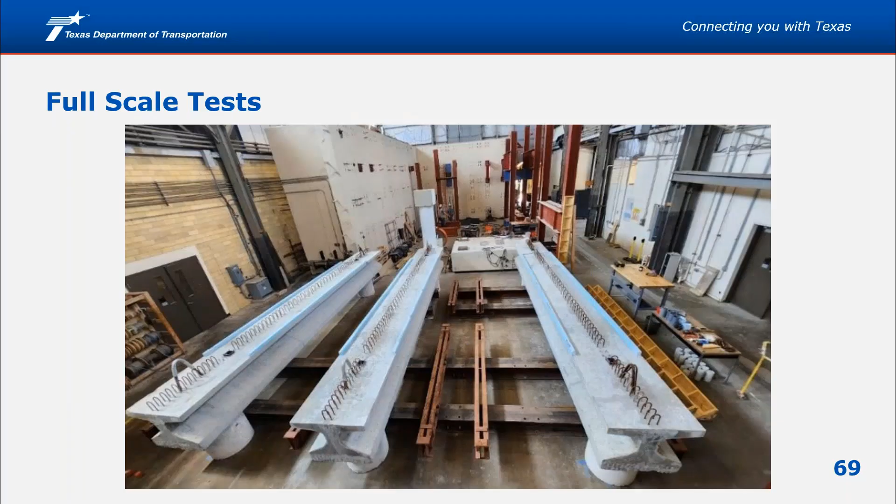That was the single panel test before. So now we also tested these within our Tx girders, constructing the bridge itself. So that was the isometric that we saw, and now here's the real world application. Some more pictures there. So again, they placed the panels here, and then they came back in and poured the concrete, the cast-in-place portion. So you see the finished product right there.

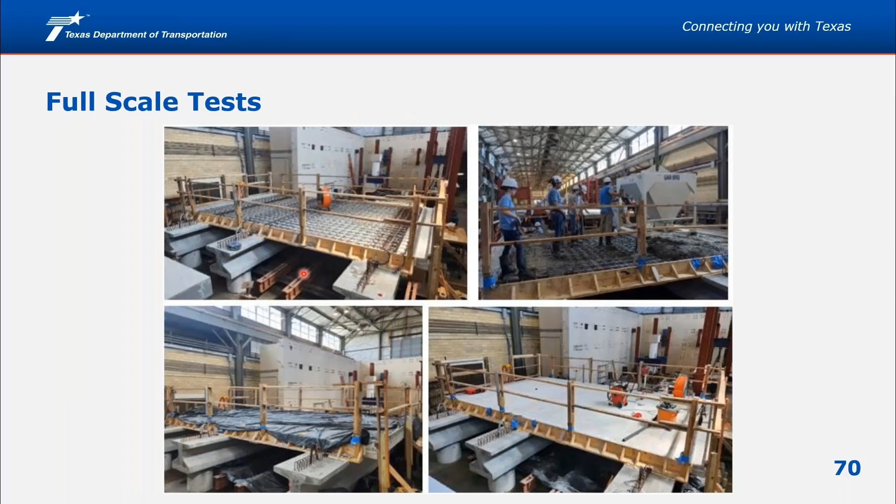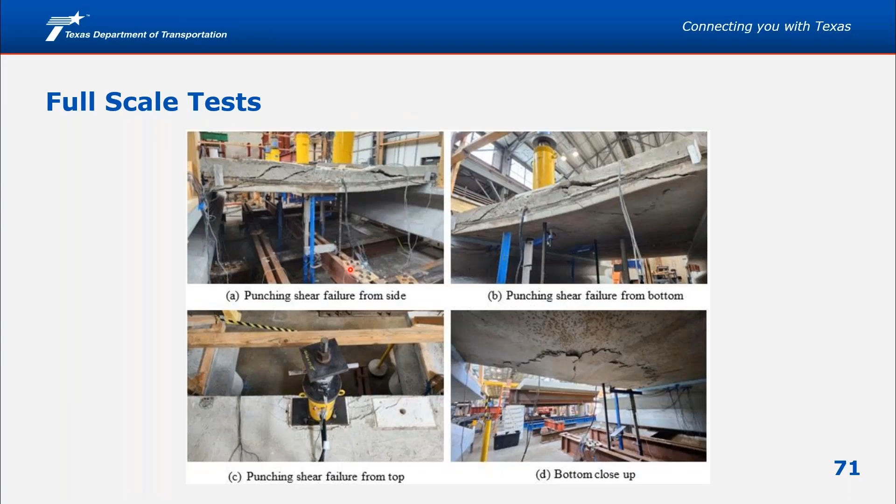And so there was a punching shear failure. You can see that in this picture. This is the punching shear failure from the side, then from the bottom, then from the top, and here's the close-up. So from that research, the researchers provided us with some design assumptions, specifications and examples. We found that these performed extremely well, and we feel very optimistic about using these for Texas bridge projects. And so we're now looking at implementation projects to implement and use these.

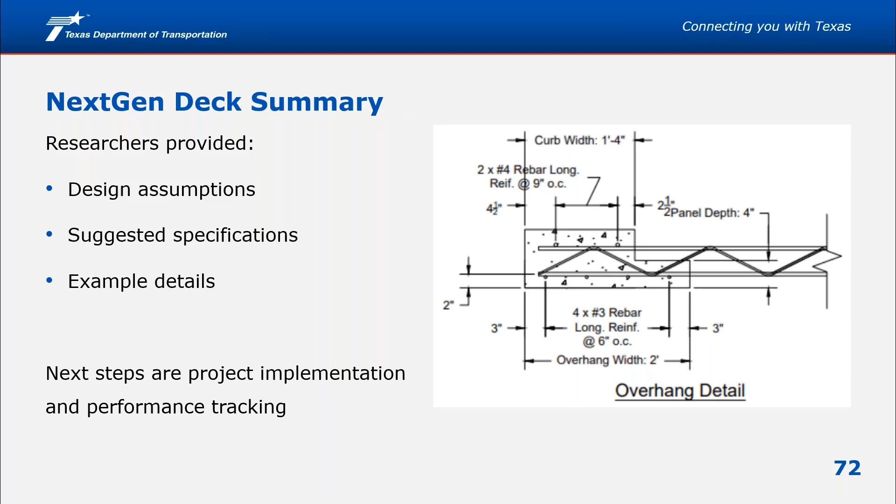And the goal for us within TxDOT is to use a lot of these standard details to speed and accelerate construction, and make this a habit for our contractors, so they get familiar with these, and then our standard details just become ABC, and it's just ingrained into what the designers are doing and what the contractors are building. And that's the way that we try to focus our innovation towards ABC. And that concludes the presentation.

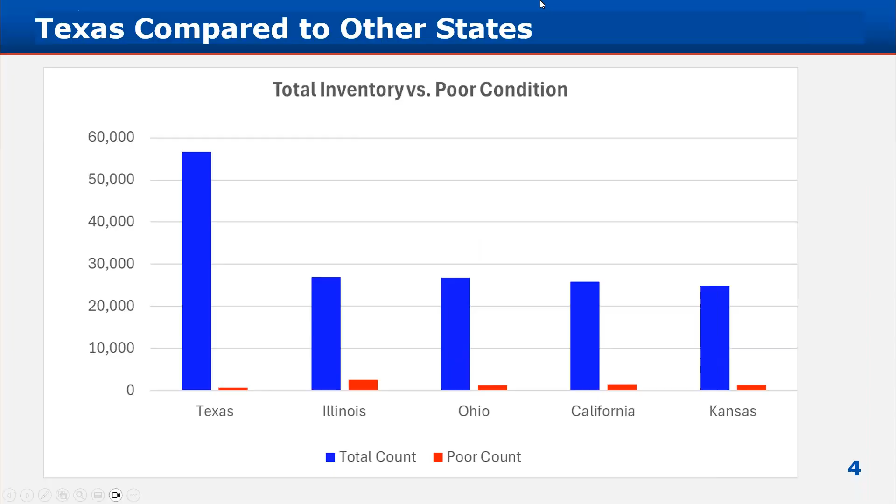We don't really have specific tools that we use to accelerate construction for redecking. Again, we just try to look at the least amount of pain that we can inflict on the project in terms of causing disruptions to the traveling public. So we try to look at different types of overlay, maybe a concrete structural overlay, or multi-layer polymer overlays, and look at those options instead of a full redecking. That's what we try to do.

Okay, we had one here. It says, are the deck overhang and the barrier walls precast? If they were, how were the segments temporarily supported? This question came in before you showed us the detail of the cross section with the parapet or the barrier on it. So, yeah, go on. Oh, I'm sorry.

So what they did when they fabricated, for example, in that Bryan project, they fabricated the bridge offsite without the closure pours. They fabricated the rail and everything offsite. And then as part of that unit, it was placed. So again, they constructed the bridge offsite and then placed it in pieces at the location.

Okay, and for the wide flange beams designed to support the overhang, do you include loads for the deck finishing machine? And how does the contractor typically place the concrete when the wide flange beams are used in practice? So let me go back really quick if I can find it. Here, this is basically the top flange that creates that overhang for the contractor. So there is actually a cast-in-place pour that happens.

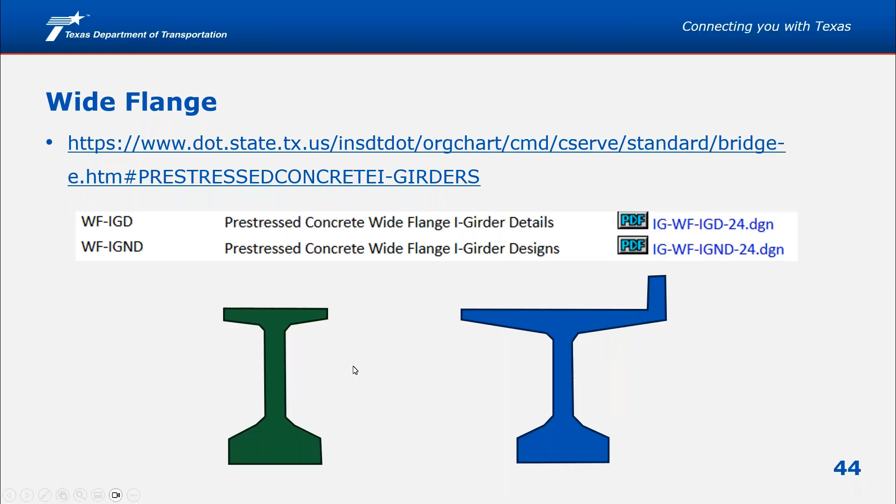So when the designers design the bridge, they go into PGSuper BridgeLink, they pull up the library, they design the structure. And that's all carried through the design. It's a little deceiving because you see the wide flange here and you see the deck on top. This portion is actually the cast-in-place portion. There is a curb element that's included that's not depicted 100% accurately in this picture, but it is included in the design for the construction phase for the design of the girder.

Okay, now if you're on a curved bridge, what do you do then? You have to form it traditionally? So yeah, a curved structure is a little bit different. I guess that's the caveat. Maybe obvious to me, but I didn't clarify.

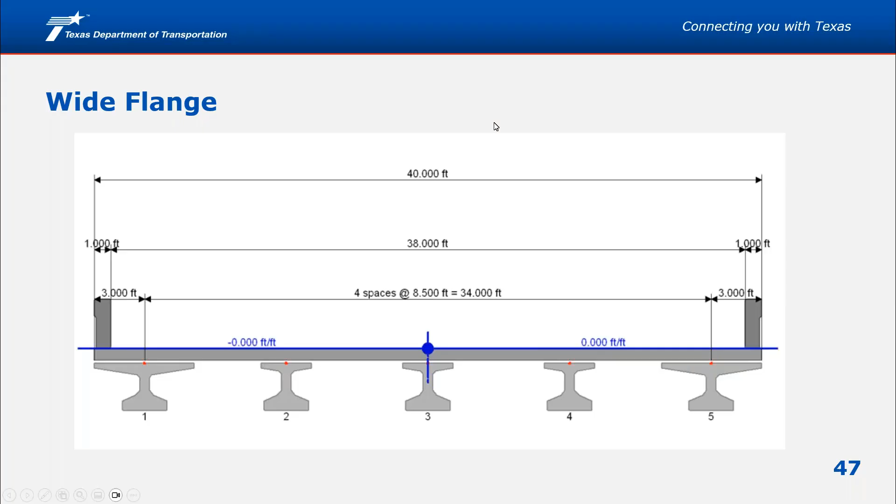Yes, it did increase the performance of the elastic behavior of that bond within the shell and the cast-in-place core. But we didn't really see a significant disadvantage to not roughening the surface - they both performed extremely well. So if we simplify the process for the fabricator and stick with the smoother surface and eliminate that extra step, that's perfectly fine. Anything you do to expedite things, right? So yes, and save time and money.

With the push to digital delivery, have the capabilities of BIM been utilized currently, or are you looking ahead at other ABC projects with the digital model? Yes, actually currently the Lubbock project we're working on, we have 3D models. I don't know if that's going to be a full digital delivery project, but we do have models. That's our policy right now - we're building the models within TxDOT for each project.

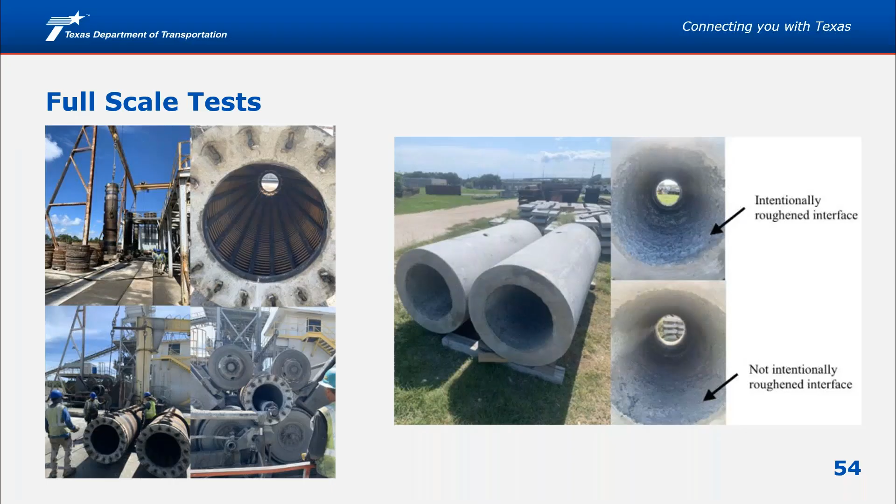So the contractors, you've got to look at the roughness surface of the panel. Within our standard, we have roughness requirements. The other thing you need to look at is the SSD condition, saturated surface dry condition of the panel, to help develop that bond. I think that's typically what we see within that longitudinal crack that's propagated up from the panel corner edges to the deck surface - again, making sure you get that bond. So a lot of it's about the contractor's familiarity and doing it the right way. Inspection controls are critical.

One quick last question here that ties to that - how many bridges have you guys built to date with full depth precast panels? You can speculate, you don't have to have an exact number. That's a little tough one. So the full depth ones, off the top of my head, I'm aware of maybe like 4 or 5, but there's probably more - that would be the number off the top of my head.

Okay, so Robert, do your standards account for skew? And then you did mention curve a little bit ago with Paul, I guess, and I know that throws some different geometrics into it, but yes.

How do you address that with your standards out there? Our typical bridge standards are on straight bridges, but we do have skews up to 15, 30, 45 degrees. Anything beyond that, curved structures, horizontal curves, or skews that fall in between those limits, is not standard. But our roadway designers in Texas understand that, so to simplify the process and get these built quickly and designed easier, they try to simplify the geometry to use our standards. It doesn't apply to every scenario, but the standards pull the largest weight of the projects we have out there, so geometry controls the use of standards.